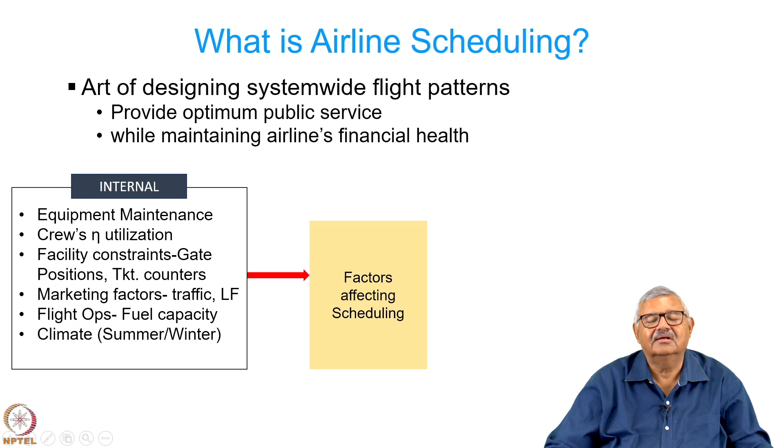There could be marketing effects like how much traffic is available, what is the load factor. There could be constraints from the fuel capacity of the aircraft. So you might like to connect city A with city B because there is tremendous demand, but the aircraft you have in your kitty may not have the range to fly from A to B directly. So you may be forced to go from A to B through C, and that is also a constraint. Similarly, climate issues, whether in summer or in winter, will impose constraints.

There are also some external constraints. For example, there are flight curfews imposed by local communities to ensure that you do not fly at times when they are resting or sleeping, like the night times. At many airports, there is a curfew of flights from 11 p.m. to 6 in the morning.

Then there are constraints because of local community disturbances. Hotel and motel operators also sometimes lead to factors which affect scheduling. For example, all hotels and motels have a certain check-in time and check-out time, and they would like passengers to be able to operate in such a manner that they are able to manage without the requirement to stay for one more day or pay for one more additional day, and they are able to take their flights.

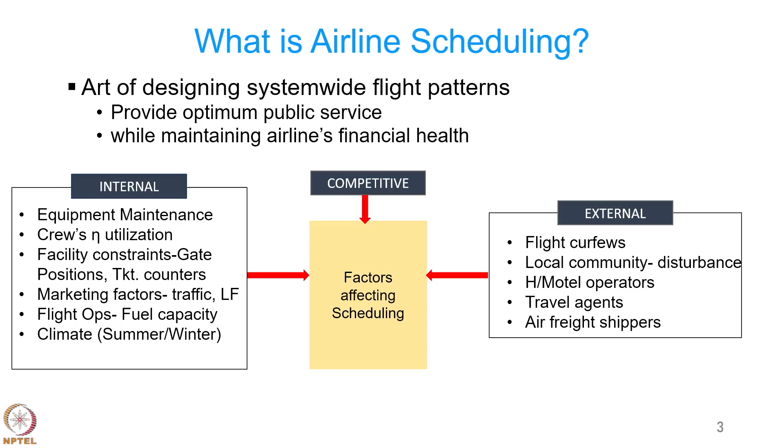Travel agents impose some external constraints. They tell you the preferable times during which flights can be expected to go full. The air freight shippers who provide you with cargo, and that adds to the bottom line of the airline quite considerably in many cases, will decide the time by which they are able to supply the cargo to the airport at some cities, so that may also affect the time. Coupled with all these internal and external factors is the competition, because the competition by other airlines can also force you, and with all these things you come up with your schedule.

There are 4 principal tasks in airline scheduling. Let us look at them one by one. The first task is schedule generation, which is a competitive timetable to meet the potential demand, and it should have some buffers to recover from the delays which are inevitable or expected.

For example, early morning and late evening flights generally have larger buffers because there is a higher probability of congestion at these times. So the flight from Mumbai to Delhi may be 1.5 hours during the daytime and 2 hours during peak time, because there is a buffer built in. Otherwise, the aircraft will always be reported as late, and that affects the image of the airline.

Fleet assignment: which aircraft type has to be assigned to a particular sector so that the revenue is maximized. Now, if an airline has a single fleet, then there is no such problem, but most airlines, especially the large ones, have a mix of fleet. They have small aircraft, medium aircraft, long aircraft, large aircraft, and they would like to ensure that larger aircraft are deployed on the hub routes and the smaller ones are on the spoke routes. So this is the important requirement of fleet assignment.

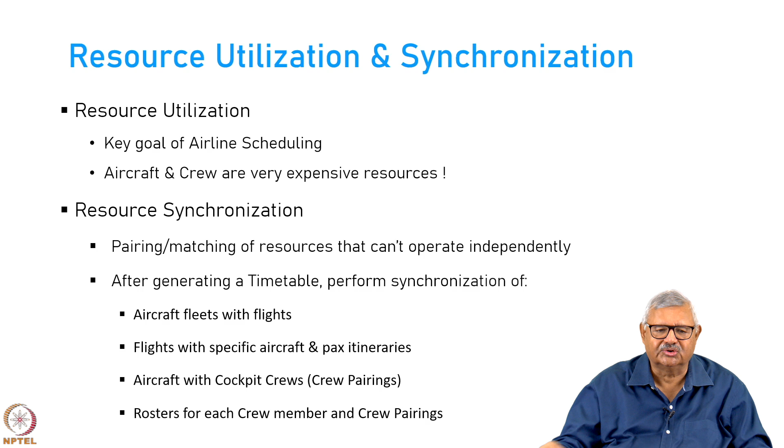After generating the timetable, you have to perform synchronization again at 4 levels: synchronization of aircraft fleets with flights, flights with specific aircraft and PAX itineraries, aircraft with cockpit crews (called crew pairing), and rosters for each crew member and crew pairings to ensure equitable distribution and that they are operating within the regulatory constraints.

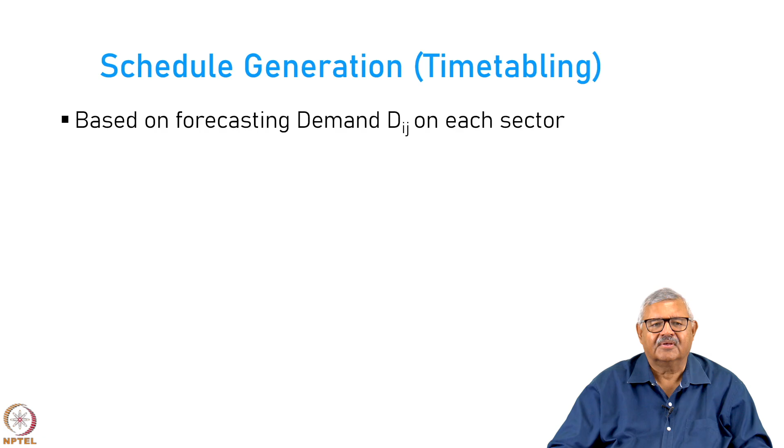Schedule generation, also called timetabling, involves many factors. First of all, it is based on the forecasting of the demand on each sector. So take a sector from I to J. We decide the departure time for each origin destination pair and frequency F as follows: Frequency equals the demand from I to J divided by the passenger capacity of the aircraft into the load factor which is expected.

Higher frequency is more appealing for passengers because they have to wait less for the next flight, and it helps in increasing market share, but there is a word of caution: offering too much frequency without the requisite demand can lead to wasteful utilization of the aircraft, lower load factors, and that can become detrimental to the bottom line. So there is an optimal frequency which has to be arrived at based on experience and very accurate modeling of the demand and prediction of how many flights will be required by each aircraft to meet the requirements.

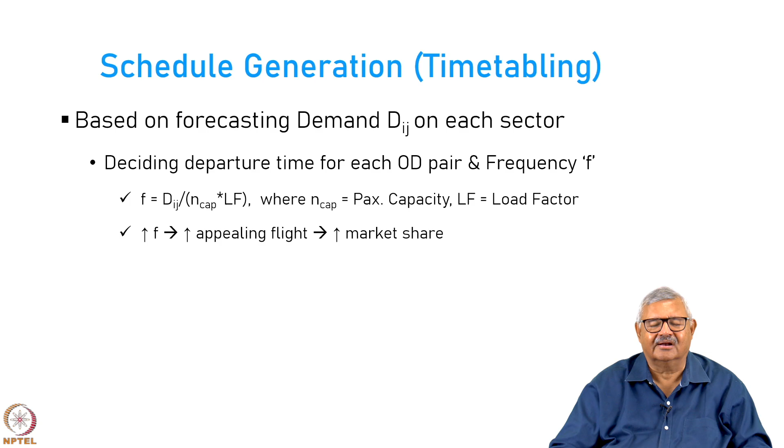The schedules are generated twice a year because there is a lot of effect of summer and winter on the schedules. So in winter, which is October to March, and summer, which is April to September, there could be differences in the schedules operated by an airline, but we have to announce them months in advance, as much as 8 to 10 months in advance.

However, it may be noted that most bookings, especially on long routes by economy class passengers, take place only about 3 months before the departure date. And closer to the time, you will have last minute passengers and business passengers. So therefore the passengers should be aware of the schedule which is being operated. You cannot do scheduling at the last minute; you have to do it much in advance and communicate to the various booking sites.

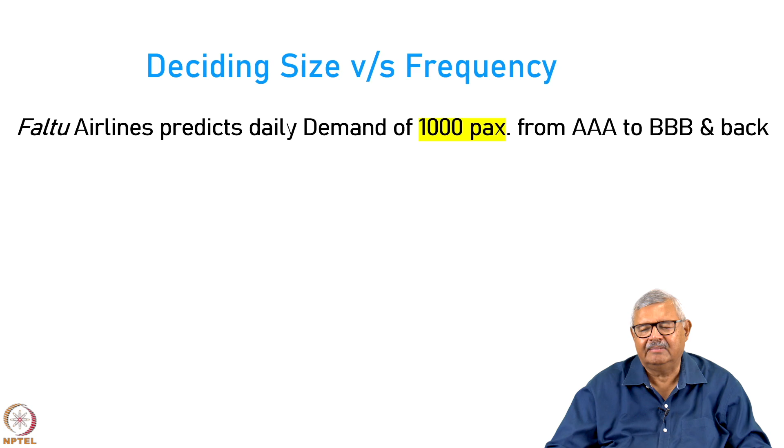Deciding size versus frequency is a choice faced by a scheduler on a regular basis, and we will look at one example. Let us consider an airline called Faltu Airlines, which has predicted a daily demand of 1000 passengers from city AAA to BBB and back, meaning 2000 passengers total - 1000 from AAA to BBB and 1000 from BBB to AAA. This airline offers a single class cabin, mostly economy, with all economy seats.

Now we have an option. The airline has 3 types of aircraft in its kitty: the first is Airbus A380, the second is A330, and the third is Boeing 787. The max capacity in this particular configuration of the airline is 550 for A380, nearly half of that, 280, for the A330, and 200 for Boeing 787.

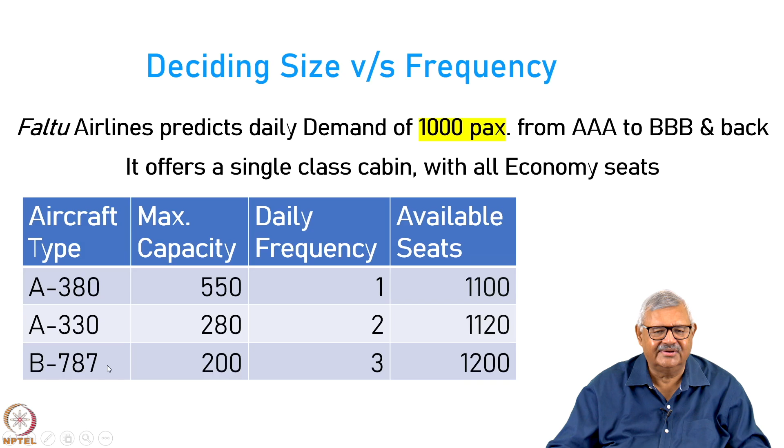If you offer one flight per day by Airbus A380, you will be able to provide a total capacity of 1100 - 550 going, 550 coming. But if you operate 2 frequency of 2 flights a day with capacity of 280, you give 1120 available seats for going and coming. If you operate an aircraft with 200 seats, that is Boeing 787, you will be able to offer 3 into 200 into 2, that is 1200 seats to go and come back. Now when we operate one Airbus A380 per day, the demand is 1000, but we have an excess capacity of 100.

The usage of Airbus A330 with 2 frequency per day leads to an extra of 120, and Boeing 787 gives you 200 more passengers. Now the question is, it is a difficult choice for the airline to decide which of these 3 options is the best option.

Offering higher frequency generally makes the load factor increase. So you might say that it is better to operate Airbus A330, which offers double the frequency. Although the excess capacity is more than that with Airbus A380, still because of the higher frequency, you can have a better chance of getting more passengers.

But somebody may argue that no, at the cost of 200 extra seats, it is better to operate Boeing 787, which is a smaller aircraft flying a frequency of 3, because definitely you can wean away the market from other airlines to your airline by offering this kind of frequency.

Somebody might say, no, let us be purely cost conscious because we are already bleeding a lot of money. Let us only offer one flight by Airbus A380, which will take care of the requirement with the minimum possible excess capacity, and by itself it is going to meet the market requirement.

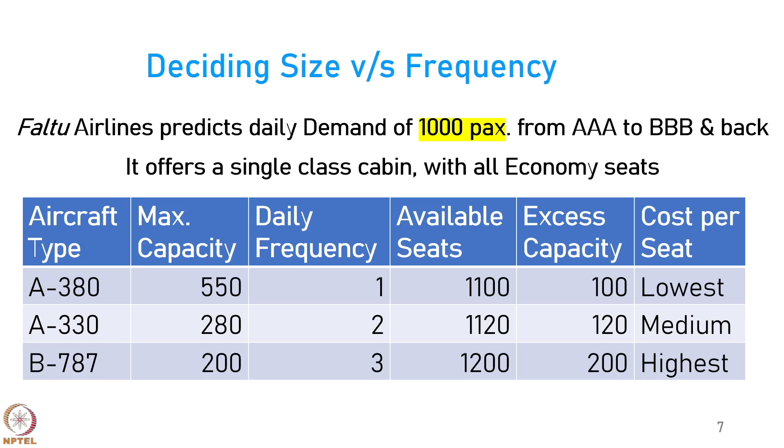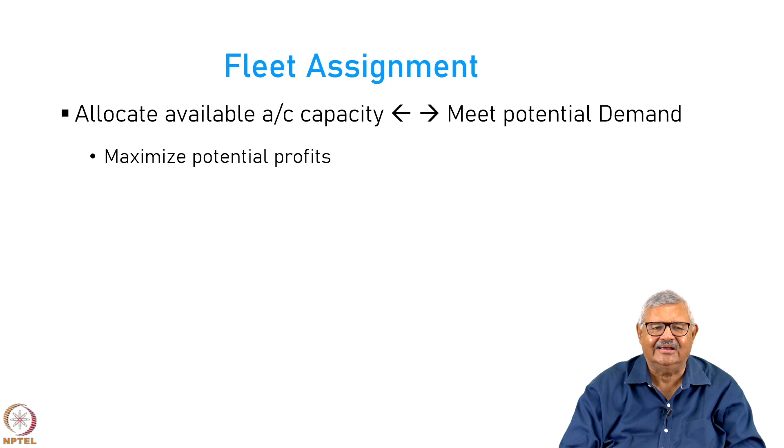Now let us have a look at fleet assignment. Fleet assignment basically means you allocate the available aircraft capacity to meet the potential demand, and it also means that the potential demand is being met by allocating the appropriate size of the aircraft, the aim being to maximize the potential profits. Now you can use different aircraft types at different routes, use larger aircraft on trunk routes, because that will give you lower frequency, but it does not matter.

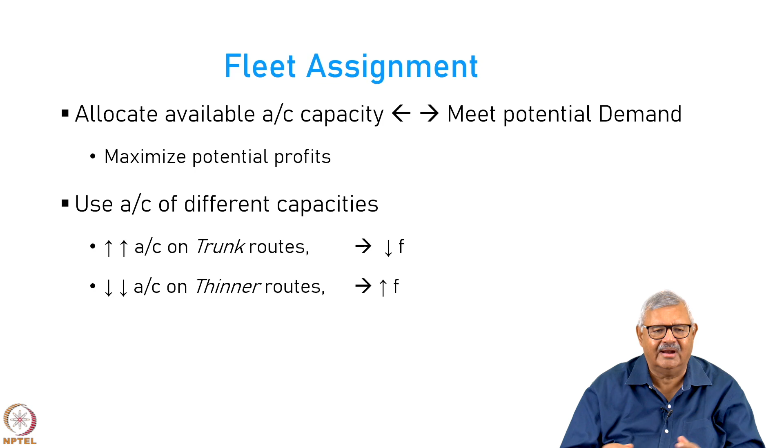On thinner routes, use smaller aircraft because you can give higher frequency there. Now, this is an inherently challenging problem.

The problem is that demand forecasts are very uncertain. You do not know in advance, but capacity of the aircraft is fixed and it cannot be changed arbitrarily at a very short notice. You cannot say that, oh, demand is less, so remove the last 7 seats in this flight and we will put them again in the next flight. It is not so easy. Sometimes it is possible, but it is not very easy to do it.

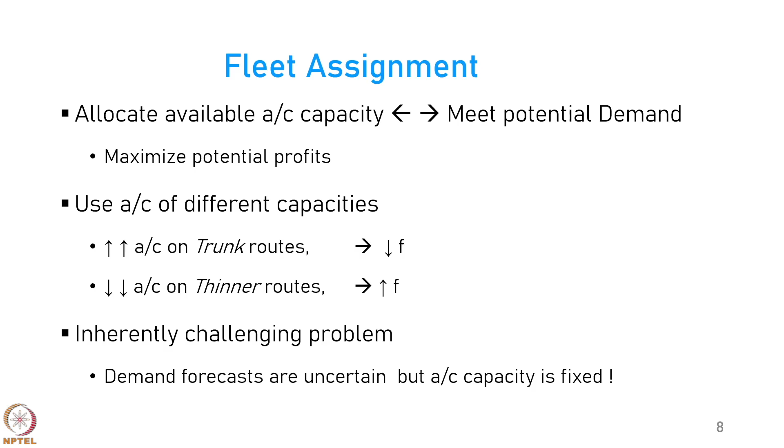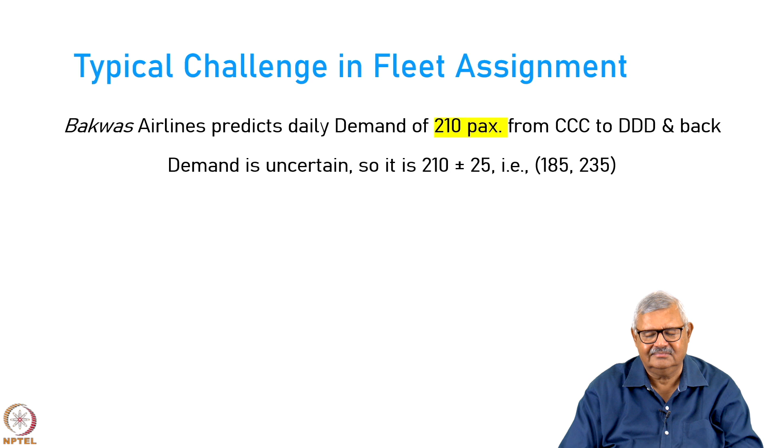Here is another example of a typical challenge in fleet assignment. An airline called Bakwas Airlines predicts a daily demand of 210 passengers from city CCC to DDD and back. Now, demand is uncertain, so it will be 210 plus 25, that is 235, or 210 minus 25, which is 185. So the demand will vary as per predictions between 185 to 235.

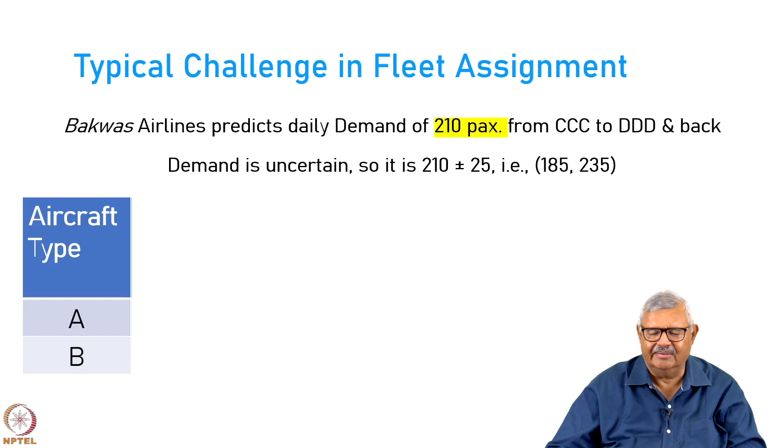If that is the case, let us look at the options. They have two aircraft types, A and B. The capacity of A is 240 and B is 180. So if we are looking at 210 plus minus 25 passengers, then with A you are actually going to carry 55 extra passengers. Whereas if you travel by B, you will carry 180 passengers, which will be 5 less than the least, 185.

Similarly, if you look at the number of seats, if the demand increases or is high, you will notice that with one flight of aircraft A, you will have 240 passengers, which is 5 more than the maximum that you expect. And if the demand on the other hand increases, if you travel for example by aircraft B, which is 180 seats, and the demand is 235, you have 55 seats less than what you could carry.

Now, the load factor by demand, let us say it is 77% for the first one, because 240 seats are available and you are carrying only about 185 seats. So, you are operating at 77% load factor.

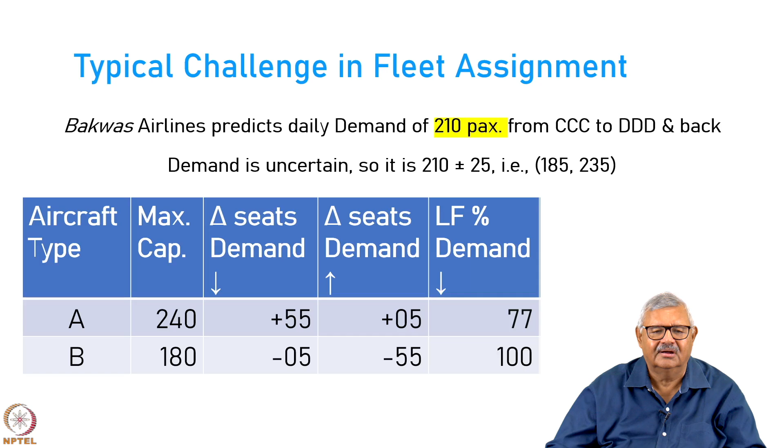In the case of B, you are actually having a seat deficit. You are not able to meet the demand. You will go full, your load factor will be 100%, because seats required are more than seats available. Now, if the demand increases, the load factor turns out to be 98% in the first case and 100% in the next case. So, the load factors are almost similar.

Now, the total operating cost per route is going to be higher for the larger aircraft, but the operating cost per passenger will be lower. The total operating cost per route will be lower for the smaller aircraft, but it will be higher per passenger. So, now the question is whether you operate A or B, which aircraft do you deploy in this particular market.

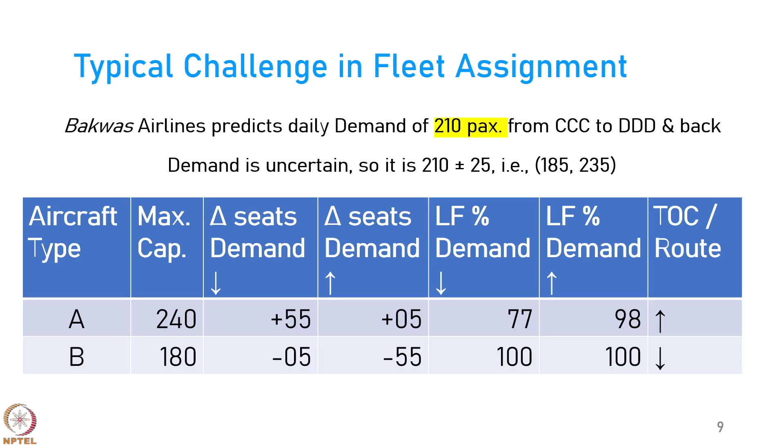Now, if you are conservative, you will say, let us go for B, because B will definitely meet the minimum requirement of 185, and we will go with full load factor, but we have lost out on either 5 or 55 seats depending on the demand. If you go with A, your load factor is almost 98%, but you are now carrying either 55 seats more than the minimum demand or 5 seats more than the maximum demand. So, it depends on your operating scenario and what factors are in play. You might choose A or you might choose B.

The load factor leverage is very important because every empty seat in the aircraft is an opportunity wasted by the airline, and therefore, it is very important to ensure that you do not have many seats vacant.

Now, it may not be a good idea to always look for 100% load factor, because if you go for 100% load factor, then passengers get the impression that they will not get last minute seats in this particular airline, that they always fly full, and passengers do not like the aircraft to be completely full. They would like to have a few seats empty, but every empty seat costs airlines some money. So, it is a trade off between image and operating cost versus the delta load factor.

Now, a small increase or decrease in the load factor can lead to a large effect on the profit and loss of the airline. Another important aspect of scheduling is the tail assignment, which is called TA.

What is tail assignment? It is the aircraft routing. Each aircraft has a unique aircraft registration code, or ARC, which is painted on the vertical tail. So, each aircraft has a specific number. Now, by tail assignment we mean which routing is to be given to each individual aircraft, so that we meet the maintenance requirements, but we also have some flexibility, so that we do not have a situation where the flight has to be cancelled or delayed because there is no flexibility.

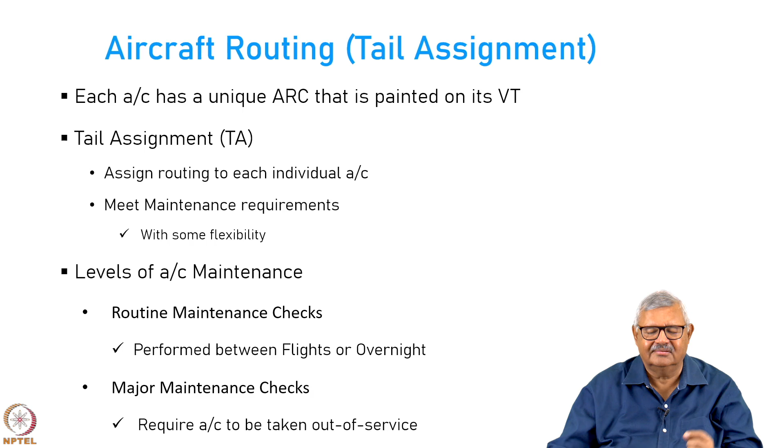The levels of aircraft maintenance also affect a lot. There are certain routine maintenance checks which are performed between flights or overnight after the aircraft reaches the destination. But you also have major maintenance checks for which the aircraft has to be taken off from normal service and sent for maintenance. Now, for a narrow body airliner, here is an example of some rough numbers for the various checks.

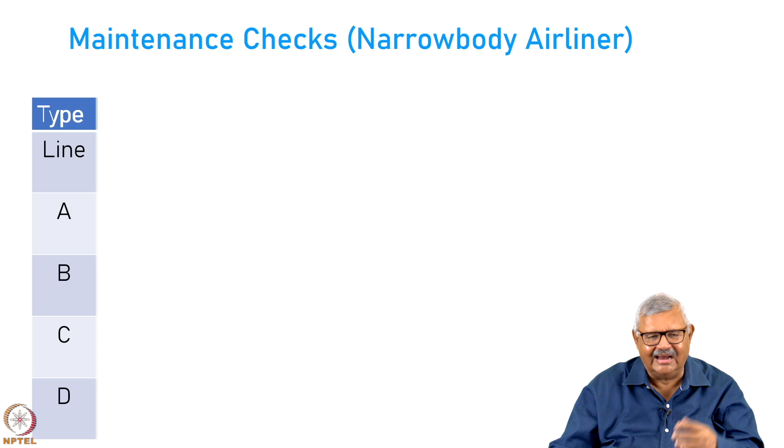The checks are called line maintenance check, or check A, check B, check C, check D. Now, there is no uniform number for this. This is decided by the manufacturer or the OEM of the aircraft, the original equipment manufacturer, and the airline and the regulatory bodies. They sit together and decide when these checks are going to be done. Broadly speaking, the line maintenance happens between every 2 flights. Check A within 8 to 10 weeks of flying, check B 6 to 8 months of flying, check C 18 to 24 months of flying, and check D can happen once in 6 to 10 years of flight.

How much time is needed by the maintenance engineers to do these checks? The line maintenance guys can do it within an hour's time, 30 to 60 minutes. Check A will require 6 to 24 hours. As you go down, you will realize it takes longer.

Now, if an aircraft is due for check D, it is out of service for approximately 4 to 6 weeks, and that is a lot of time.

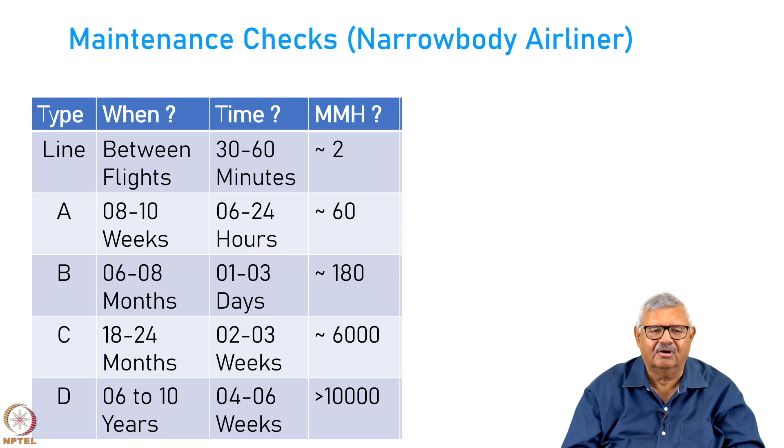How much maintenance man hour is required to do this check? Probably 2 maintenance man hours are enough for the line maintenance, but you may require around 60 for check A, 180 for check B, 6,000 and more than 10,000 for the last one.

So between each flight you do the line check. Check A is done after either 200 to 300 trips or between 400 to 600 hours. In many cases, check B is merged with check C, and in some airlines what they do is say that they will do a part of check C every time they do check A or B, so that they do not have to keep the aircraft away for such a long time.

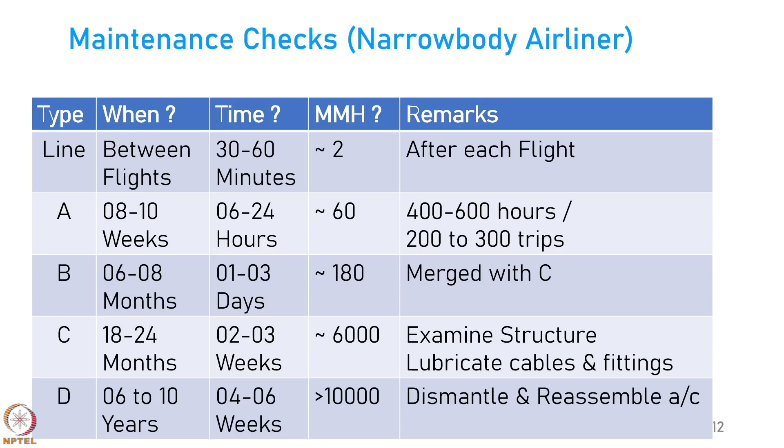Check D is the most extensive because the whole aircraft is dismantled, inspected, repaired and reassembled. There are some challenges in tail assignment. The maintenance schedules have to be strictly followed. You cannot take exceptions regularly, you can have them once in a while.

Therefore, it is important for you to position the aircraft just in time at the maintenance base. If you arrive too early, the aircraft is just idling on the ground and you are wasting the opportunity of earning money. If you are not able to do it properly, you may be forced to make one flight without any passengers just for placing the aircraft for maintenance check. That is called a non-revenue flight for positioning. This can be very expensive and should be minimized.

So you also have to balance the aircraft wear and tear due to operating conditions. Some things go bad more in hot and cold conditions, some things go bad more because of the takeoff and landing cycles. So you have to balance the wear and tear and look at the operating conditions.

I will give you an example of a typical challenge in tail assignment. I have taken the example of a theoretical domestic airline operating in India. Assume that all flights are originating from D, at this location, and have to end at Mumbai, which is M for night maintenance. So this airline has its night maintenance at Mumbai, and there is a requirement that everything should start from Delhi and end at Mumbai.

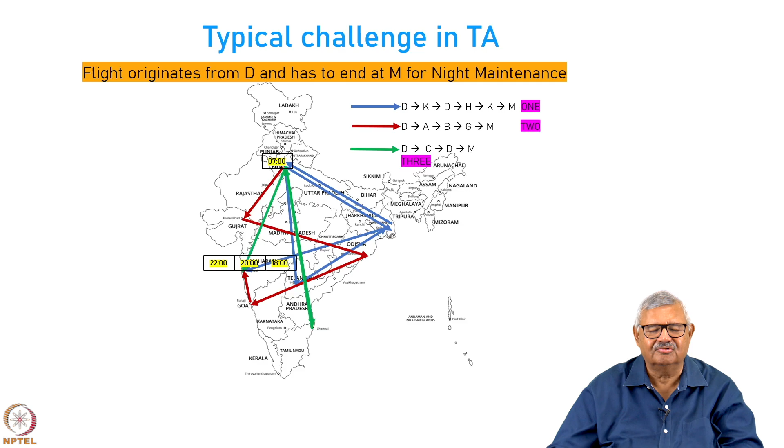The maintenance timings are from 2300 hours to 700 hours, which means the aircraft reaching at 1800 hours is unnecessarily spending so many hours on the ground. The one which is coming at 2200 is just in time, 1 hour before, with some margin for delays. Now it is up to you.

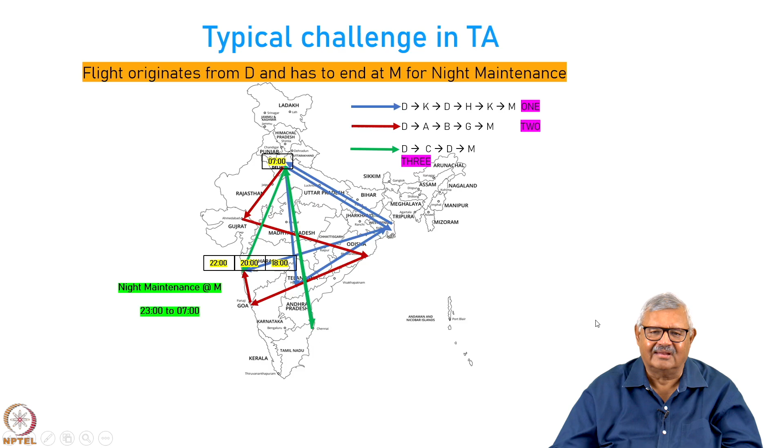One of the routes, route number 1, gives you the maximum number of flights, but the plane arrives just 1 hour before maintenance. Someone might say this is the best routing - more travel, more flights and less maintenance time wasted - but somebody might say no, it may be better otherwise. So it depends on the situation.

Now, what is crew scheduling? Matching the crewing requirements of different fleets with the routings, which involves 2 important aspects: crew pairing and crew rostering. What is crew pairing? A series of flights for the crew member. The crew member would normally like to start and end at the same location, so that you do not have to book hotel accommodation for that person. He or she can start from their own house, do the operations for the day, and come back to the same city and go home.

This can happen over 1 day or many days, so there may be intermediate stops at other destinations, and you have to ensure that you do not stay too far away from the base, because then you may have to compensate. You also have to meet legal requirements, because there is a requirement that in 24 hours a pilot can only fly for about 8 hours. These are called flight duty time limitations, FDTL. Then there are also crew bargaining arrangements.

There are maximum flight hours per year you can't exceed. Crew rostering basically means assigning crew to individual flights. Here you have to meet various requirements and constraints, the first being skill requirements.

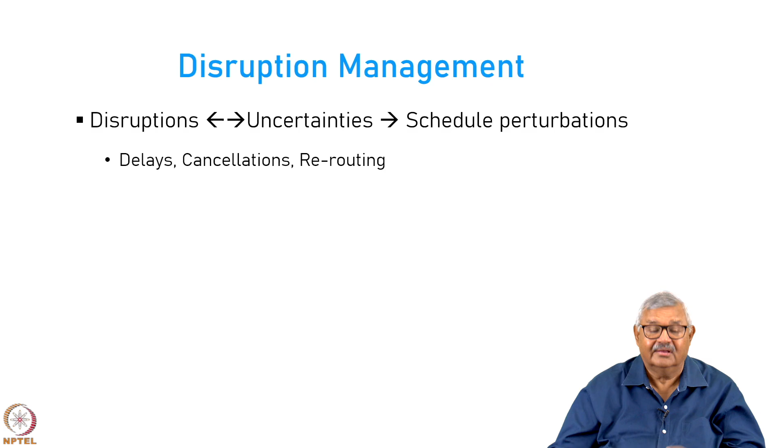Disruptions are due to uncertainties and they lead to schedule perturbations, delays, cancellations, and sometimes rerouting. The main problem is that if you delay a flight, there could be a chain reaction effect on other flights unless you have budgeted certain slack in your schedule.

If you have a chain reaction effect, there could be an increase in operating cost and loss of goodwill, because passengers will not like an airline which regularly encounters delays. The schedule recovery process is very important.

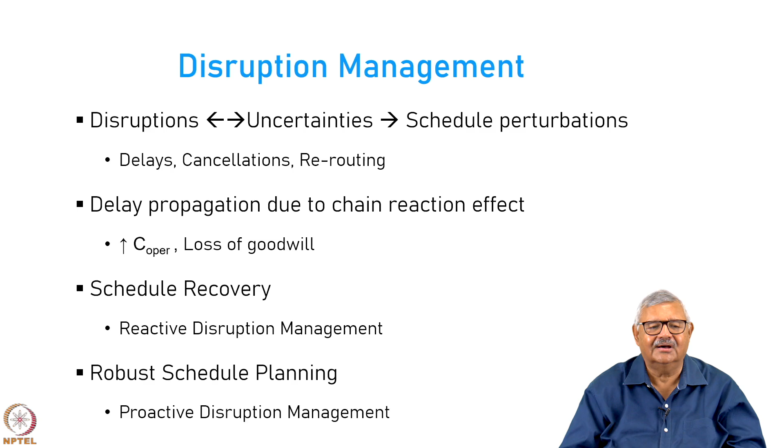It could be reactive or it could be robust, which is proactive. Normally a robust, proactive disruption management approach is recommended, but sometimes it may not be possible, and you may have to do it only in a reactive fashion.

There are many causes for delay in airline operations. The most common cause is restrictions because of ATC, which is very common. In every flight during peak hours, the pilot announces that we are expected to reach by a certain time, subject to delays due to traffic congestion and ATC. It is very common, and what can the ATC do?

If all flights are arriving at the same time, depending on the constraints of the instruments and facilities available at the airport, they can only channelize a certain amount of aircraft in a given time. Others have to hold up in the air or sometimes even be diverted when the weather becomes bad. So this is very common.

Adverse weather is a huge reason for delays, especially in North America and Northern Europe, and in North India it happens during winter. There are also strikes which can happen suddenly.

Then there could be late arrival of an aircraft, because of which connecting passengers are going to have a problem. Sometimes we have to delay the flight to accommodate connecting passengers.

There could also be problems because of late arrival of the crew or catering. Then there are maximum takeoff weight restrictions, which can happen if the weather becomes adverse, too hot, or if winds are in the tailwind direction. There could be restrictions on how much weight you can carry, so you sometimes have to offload.

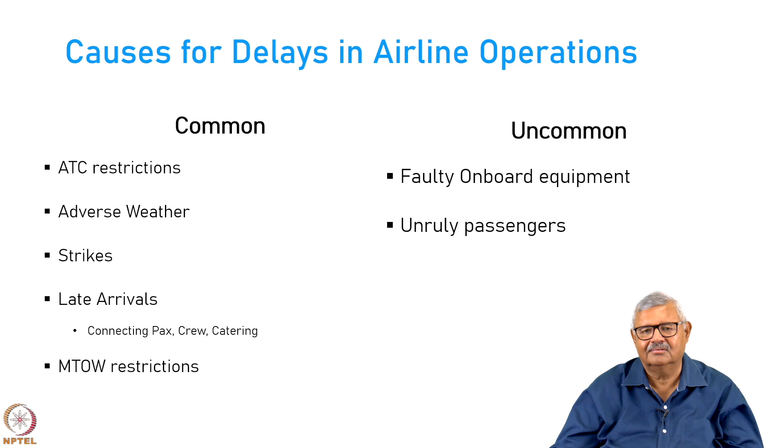Uncommon causes of delay are faulty equipment on board; if it's equipment required per the minimum equipment list, or MEL, then you can't fly and must repair it. There could also be unruly passengers. This is increasing over time because people are losing patience, and unruly passengers have caused many delays.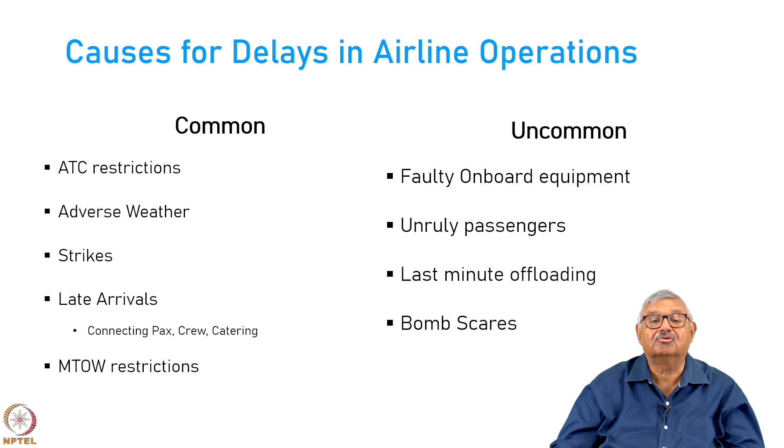Last minute offloading can also happen. There could be bomb scares. These are some of the uncommon reasons.

Now, when we plan the schedule, there are many things to be kept in mind. You have to keep in mind time zones. People at the destination should also be at a convenient time. You have to look at the constraint because of availability of station personnel. The equipment has a turnaround time, and you cannot schedule the next flight before the turnaround time. Then there will be a chain reaction effect.

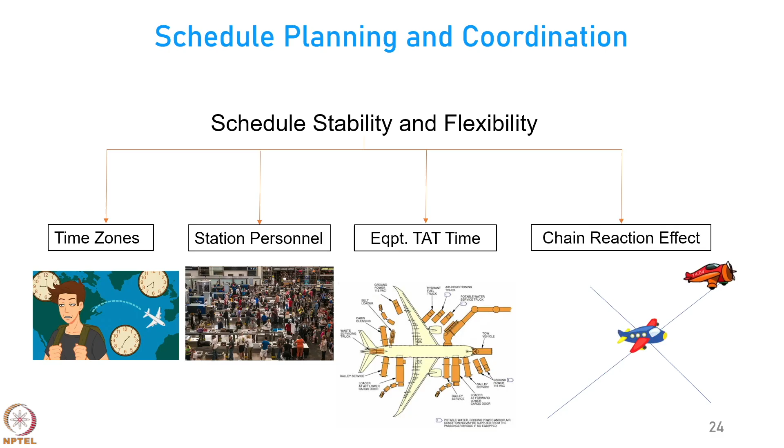If one aircraft gets delayed, then there is a chain reaction and that can cause a problem.

So there are many disruption management schemes. As I mentioned, there are two broad schemes: a reactive scheme and a proactive scheme.

In the reactive scheme, you basically delay or cancel flights. You reroute the aircraft or the crew members. You use a reserve crew sometimes. This can be expensive, but this is also possible.

Reserve crew are members of crew who are ready and available at the large stations where you expect a lot of delays and disruptions. So you have reserve crew members available to take over, and you can also deadhead the crew, as I mentioned to you.

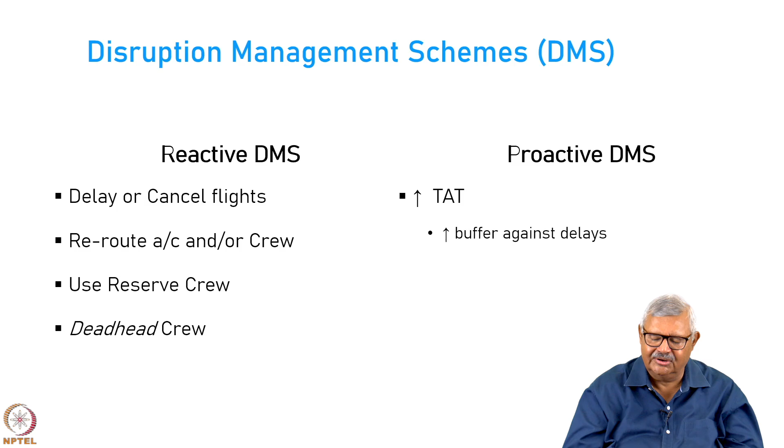The proactive DMS, or disruption management schemes, is to give increased turnaround time in the flight scheduling itself. So you may actually require 30 minutes for turnaround time, but when you are expecting delay, you give a 40-minute time. You give a buffer of 10 minutes or more.

Then you minimize the impact of propagated delays, because what you can do is, if there is a delay and you want to catch up, the pilot can fly a bit faster to cover the time loss.

This has happened several times when I have flown from Mumbai to Delhi or back, when the pilot says that we are delayed, but we will take care by flying a bit faster. They do not announce it, but they end up reaching much faster.

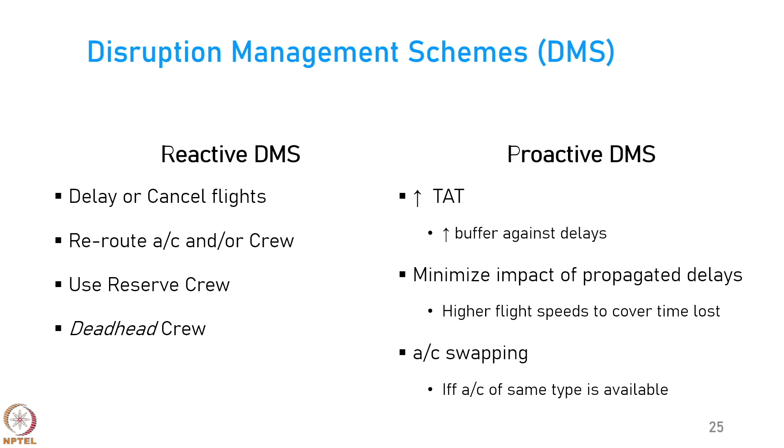And then sometimes you can do aircraft swapping. If you are an airline which has got spare aircraft, which is very expensive actually to keep aircraft on ground, but if you have a large airline, you need to have some spare aircraft which can be swapped if time is permitted.

Now let us quickly look at what kind of equipment assignments are possible, in service and out of service. The equipment here means aircraft, it could be on scheduled service. There could be an extra section, additional aircraft to carry more passengers if the demand increases.

There could be some aircraft kept for charter flights. Then, some aircraft could be out of service for maintenance checks, or sometimes for flight trainings, although many airlines nowadays provide flight training along with normal conventional flights to the extent possible.

And then there could be some reasons for which the aircraft has been out of service. For example, if you want to change the seating layout, the aircraft has to be kept away for some time. And as I mentioned, there are line reserves, extra aircraft for emergency.

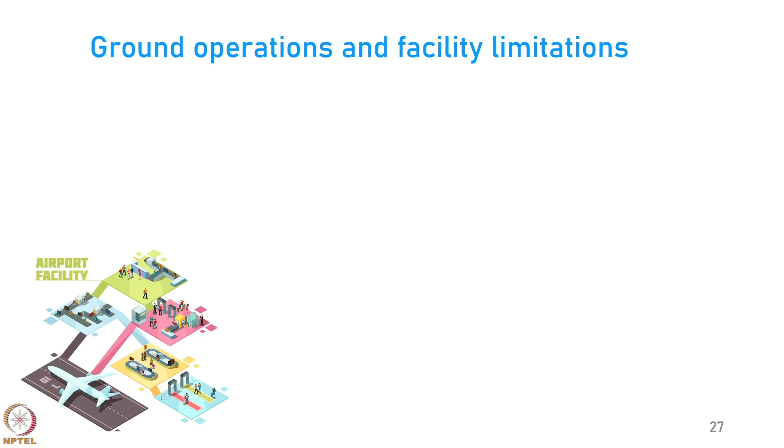There are many limitations because of the ground facilities and all that. So let us have a look. There could be a problem with the gate positions, and therefore you need to have extra time for delayed arrivals. You must have enough ticket counter space.

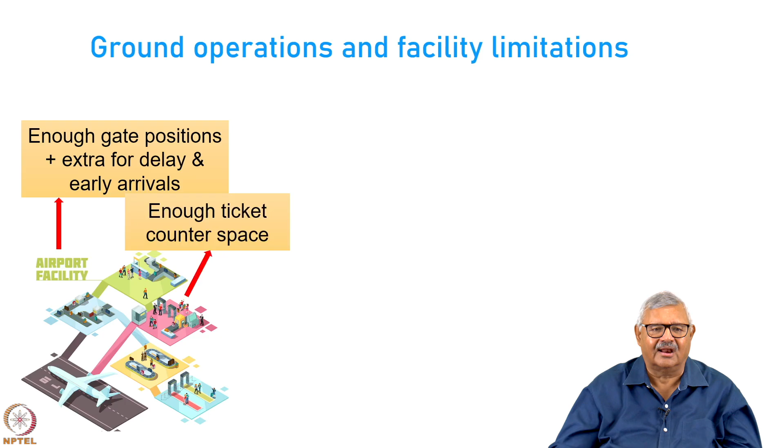You must allow transfer of passengers and cargo very quickly. So you need to control the number of flights which are departing and arriving at the airport at any time, because delay or early arrival can affect the entire schedule.

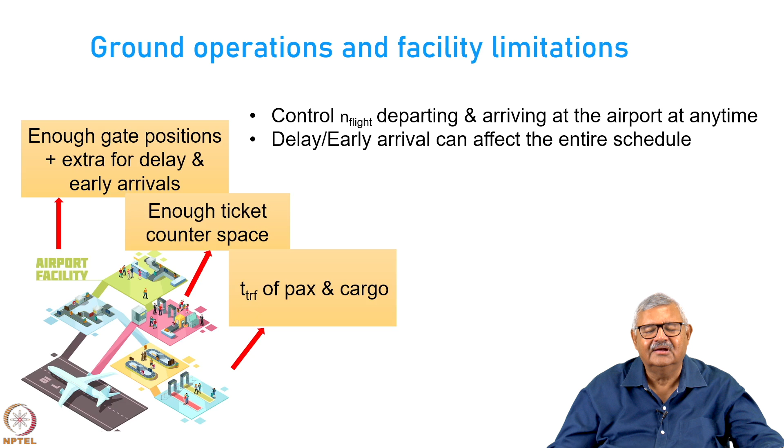Sometimes you may not be allowed to arrive very early because it is a just-in-time arrival. You do not have the crew members or the gates or the terminal space to support arrivals. Then there could be delay in operations.

So finally, let us sum up. What are the key takeaways of today's look at airline scheduling and disruption management? The scheduling reflects many factors: internal, external and competition. It is a function of travel demand and the nature of the network, hub and spoke or point to point.

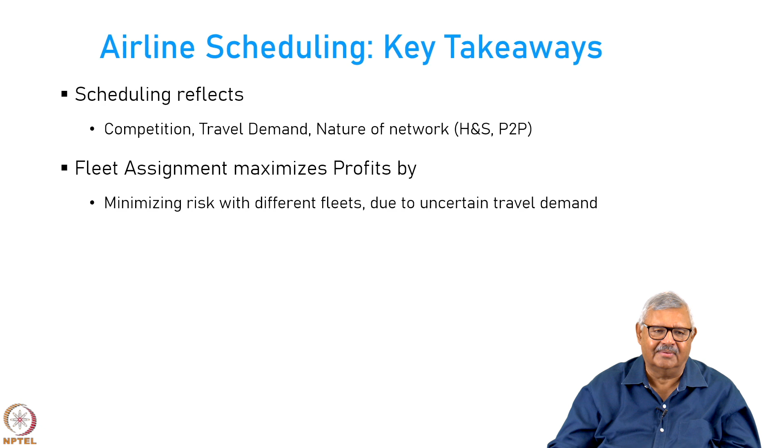The fleet assignment maximizes profits by minimizing the risk with different fleets because of uncertain travel demand. Aircraft routing ensures efficient operations by synchronizing flights with aircraft and crew with aircraft. This is a very, very difficult balancing exercise.

Airline crewing is a complex problem, and we will talk about it in a separate session, how airline crewing is obtained. It is complex because of regulatory requirements and crew bargaining agreements.

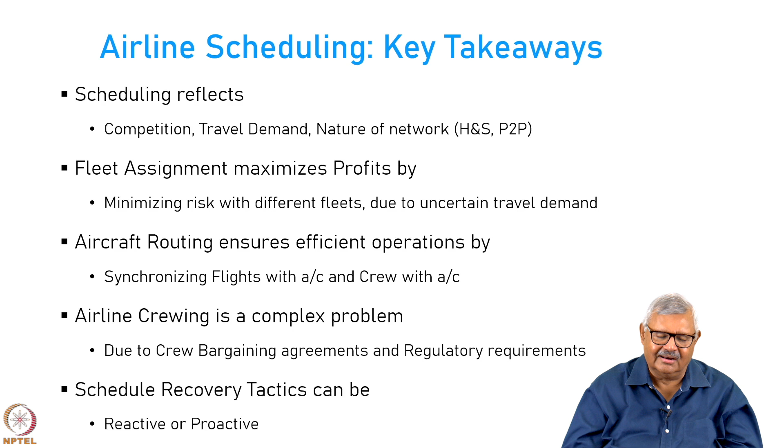Finally, schedule recovery tactics can be reactive or proactive. Most busy airlines incorporate certain proactive approaches in schedule disruption management, but sometimes the only option is reactive.